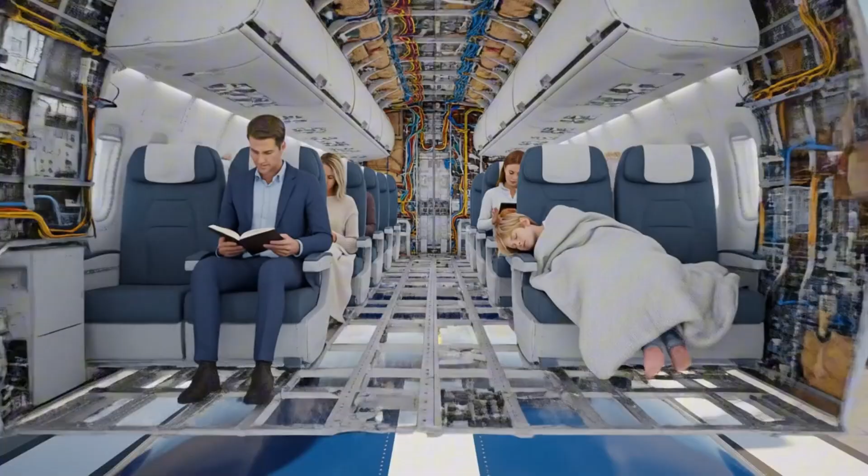But right beneath your feet, just inches away from where children are sleeping and people are reading, is one of the most volatile environments on Earth. You are casually hurtling through the sky while sitting on top of nearly 40,000 gallons of highly explosive aviation fuel.

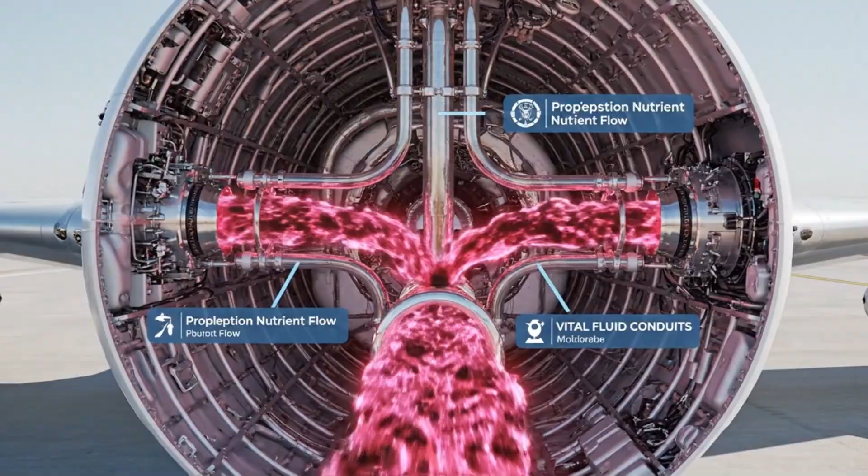If you were to look out the window right now, you would see the wings slicing through the clouds. Most people think those wings are just solid pieces of metal, carefully shaped by aerodynamic laws to keep the aircraft aloft. They imagine the fuel, the lifeblood of this massive machine, is safely hidden away in some armored vault deep within the belly of the plane.

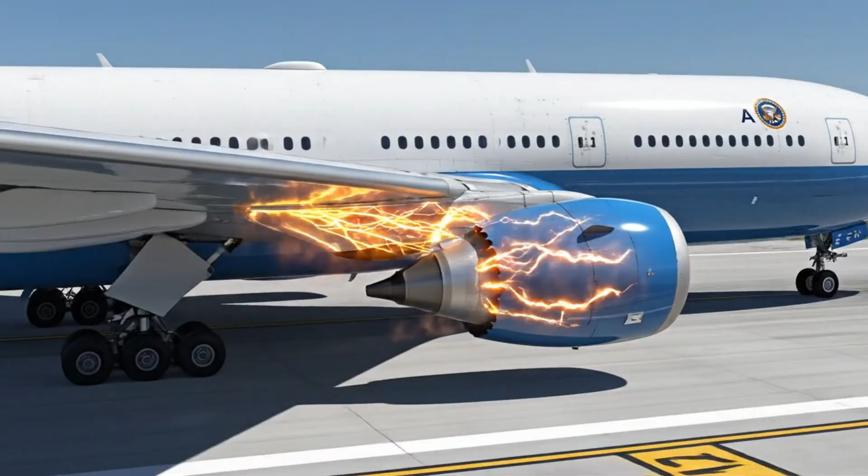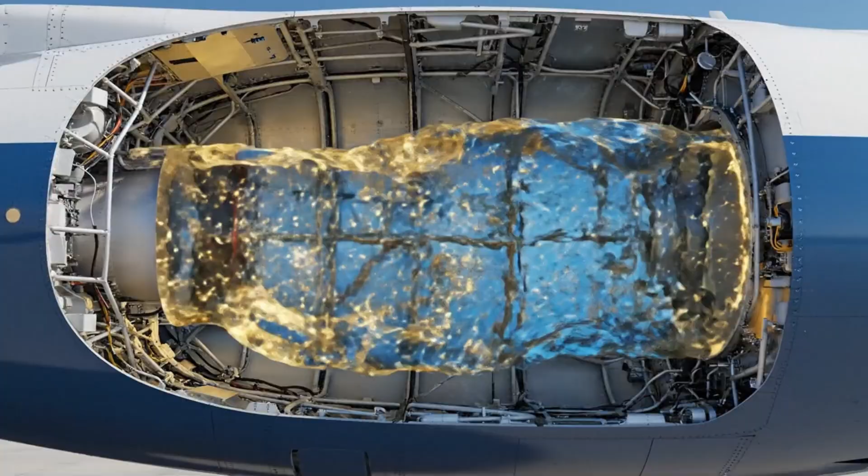But the truth is far more unsettling. Those wings are not just lifting you, they are holding the very explosive power that could tear the sky apart. The wings are the tanks. You are suspended in the air by two massive floating pools of kerosene.

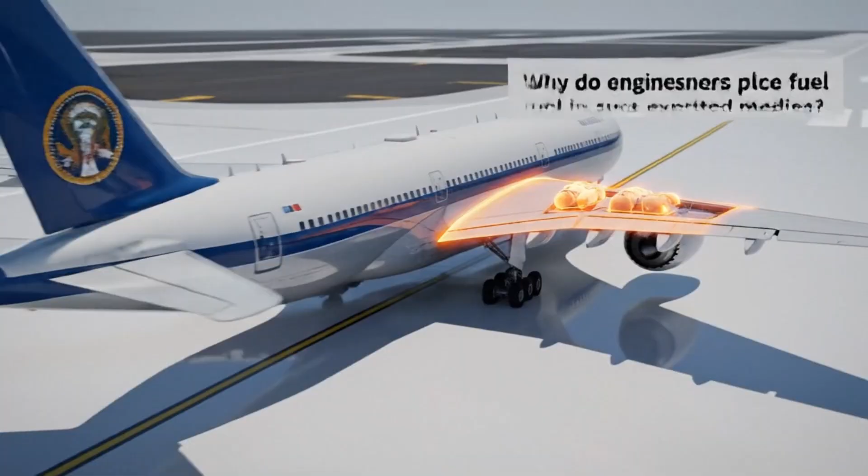Why would the world's most brilliant aerospace engineers take a perfectly good flying machine and pack its most vulnerable, exposed, and fragile extremities with thousands of gallons of flammable liquid? Why not put it in the center, where it is protected? It feels like a catastrophic design flaw.

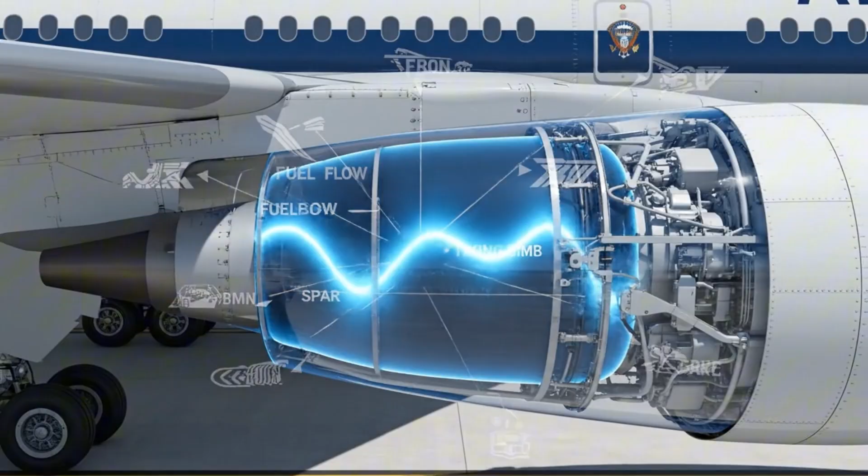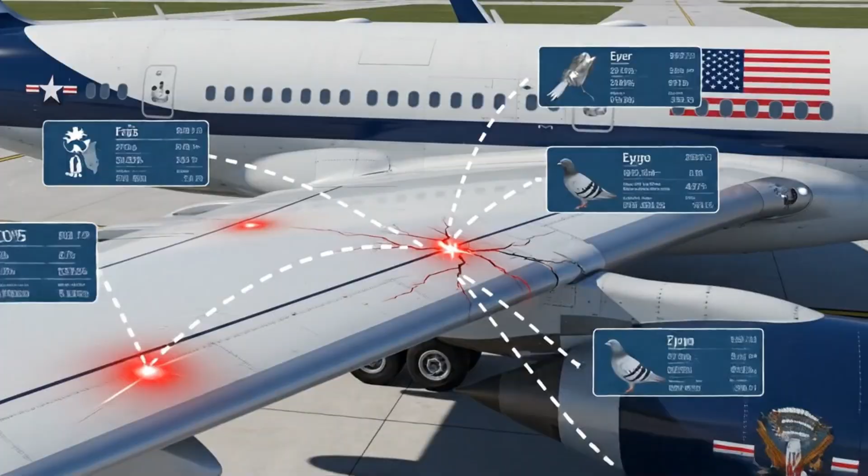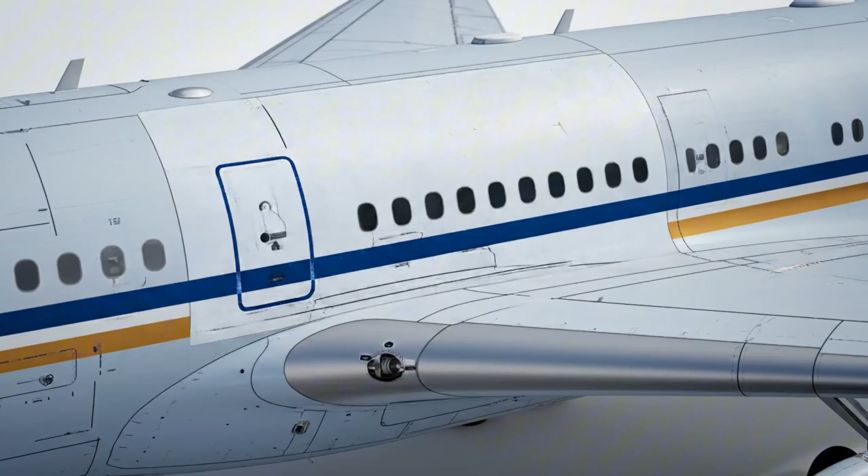It feels like a ticking bomb waiting for a single spark, a single bird strike, or a single structural failure to ignite. Have you ever really stopped to think about the sheer mechanical audacity required to keep you alive up there? We board these massive machines blindly, trusting a system we barely comprehend.

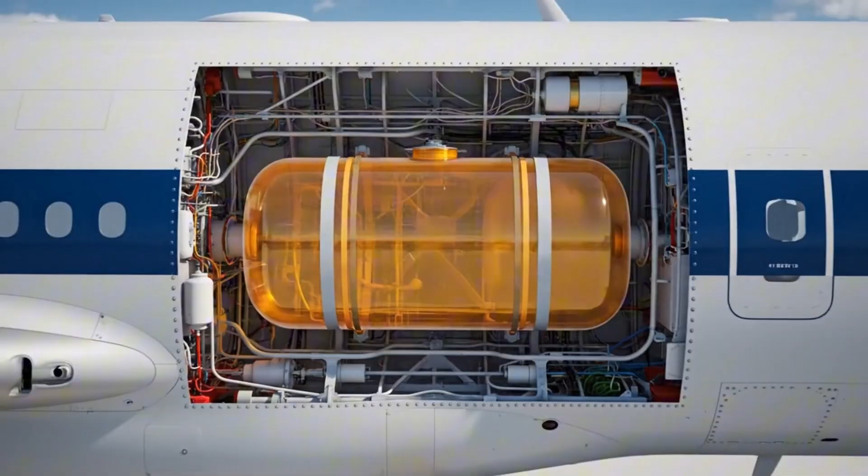Those who take a moment to look deeper into the shadows of aviation design usually find themselves questioning how we ever dared to conquer the skies in the first place, and perhaps realizing that true safety is just an illusion masked by clever engineering. The answer to this terrifying design choice isn't born out of convenience, it was born out of a desperate mathematical necessity.

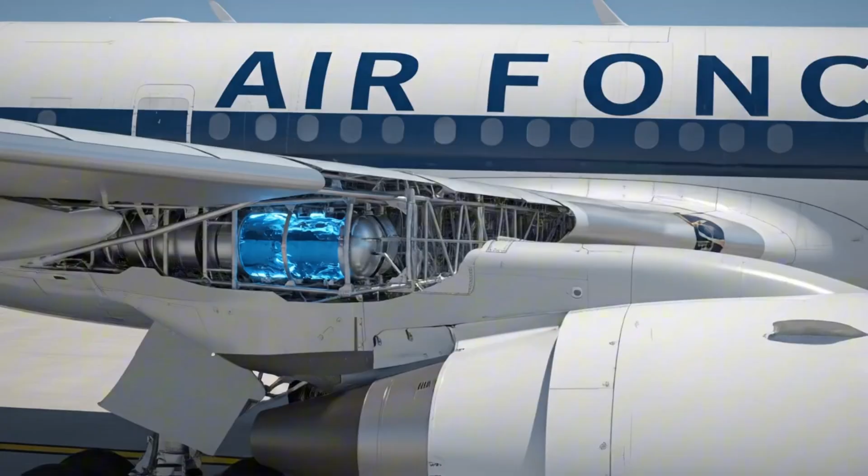If the fuel were stored where logic dictates it should be, none of us would survive the takeoff. The next time you walk down the jet bridge, you might want to pay closer attention to the shape of those wings, because they hide a secret that engineers rarely talk about with passengers.

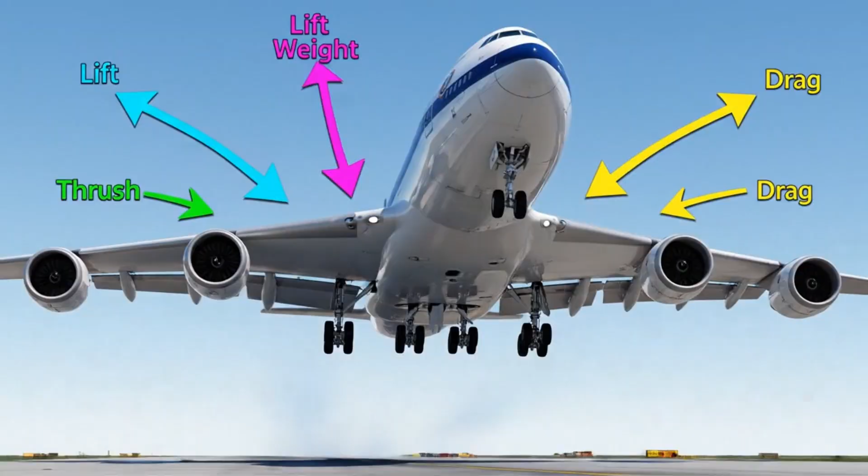The very thing that makes the wing a flying bomb is the exact same thing that prevents the aircraft from snapping in half mid-flight. To understand this paradox, we have to look at the invisible forces trying to destroy the plane the moment the wheels leave the tarmac.

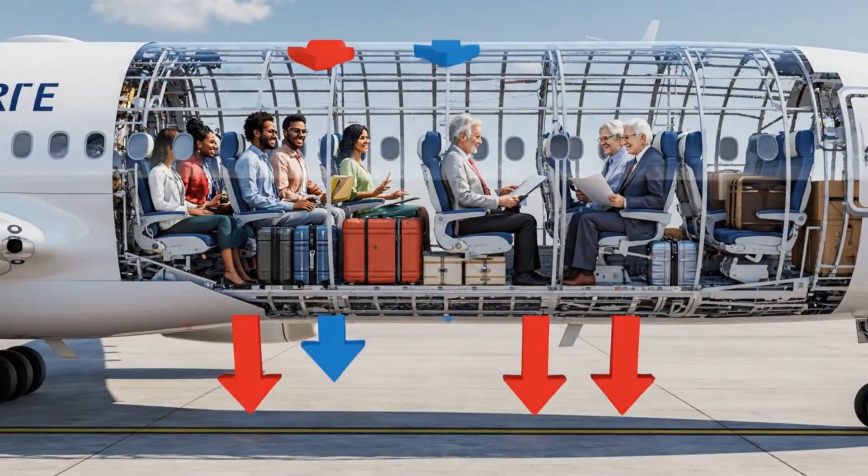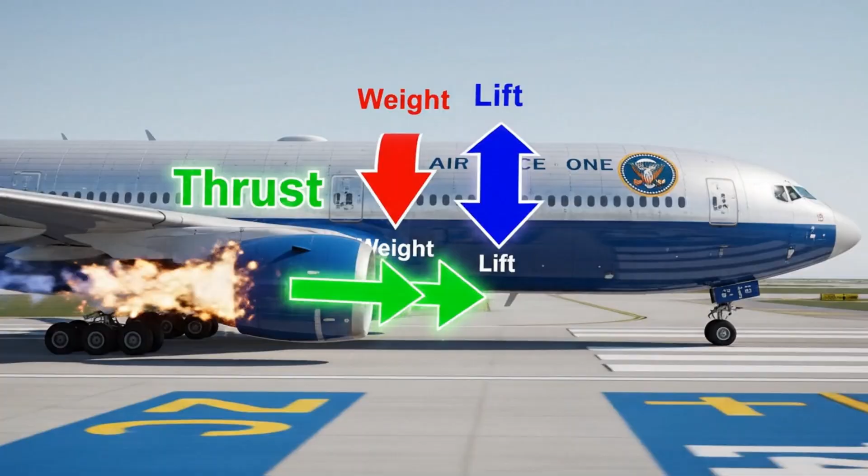Gravity is not the enemy here. The real enemy is the airplane's own weight. When a massive airliner sits on the runway, it is a dormant beast weighing hundreds of thousands of pounds. Every piece of cargo, every passenger, every piece of metal is pressing down toward the earth.

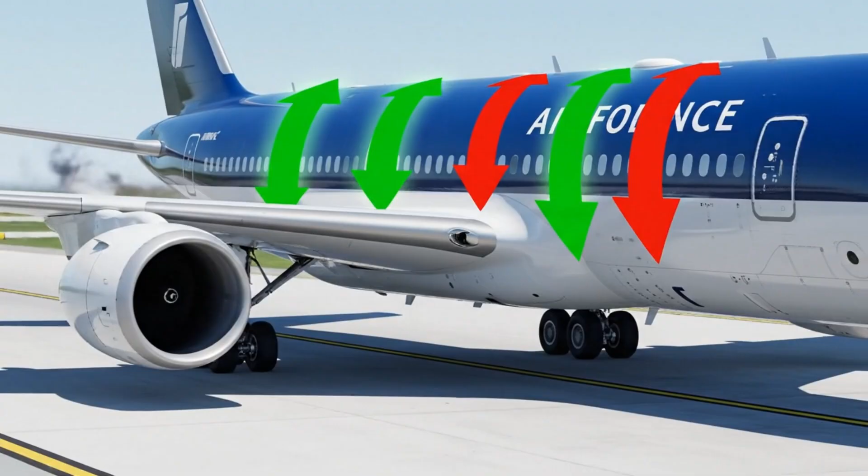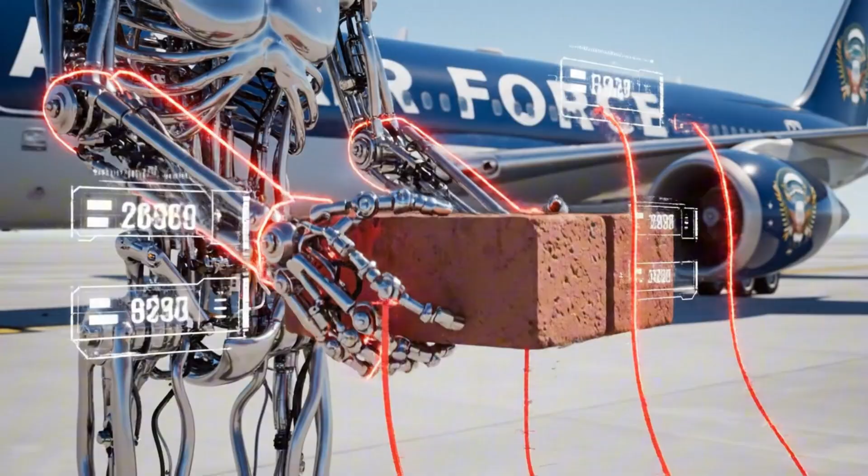But the moment the engines roar and the plane accelerates, a violent tug of war begins. The wings start to generate lift, pulling upward with unimaginable force, while the heavy fuselage, the main body where you are sitting, is being dragged down by gravity.

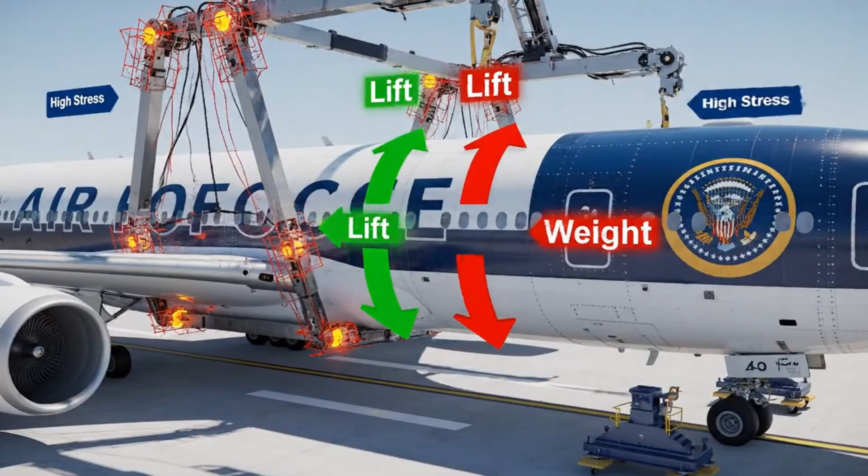Imagine holding a heavy brick with your arms outstretched. The tension on your shoulders is immense. Now imagine if those arms were thin, hollow metal structures trying to lift a multi-ton steel tube.

Under normal circumstances, the upward force of the lift and the downward force of the cabin would cause the wings to simply snap off at the root. It is a structural nightmare.

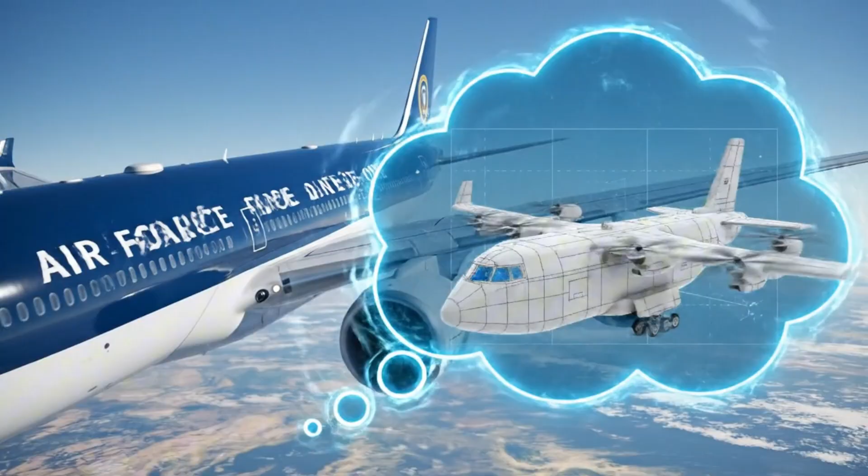Engineers realized early on that they could not just build thicker, heavier wings, because then the plane would never leave the ground. They needed a counterweight. They needed something heavy enough to push the wings back down, counteracting the violent upward lift, yet useful enough to justify bringing it along. Imagine what would happen if we actually followed our basic common sense.

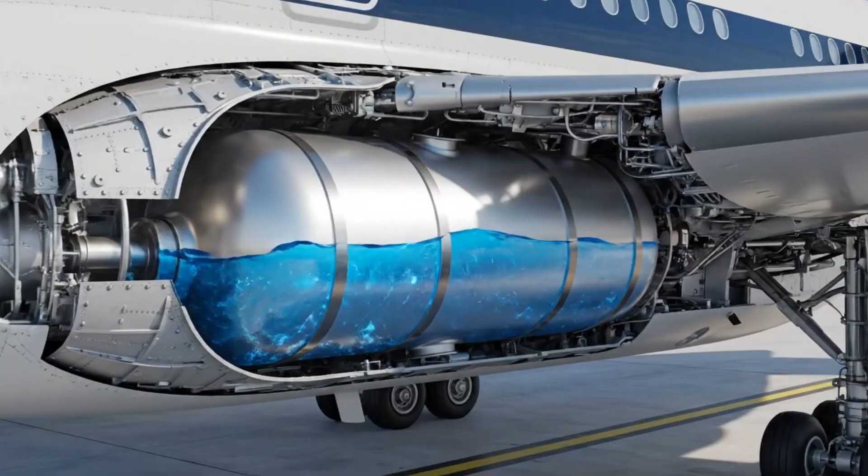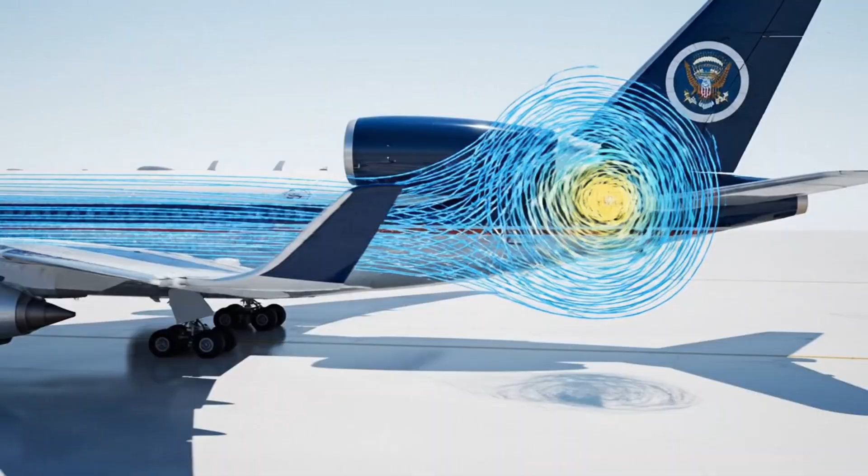Imagine if we took all that highly combustible fuel out of the wings and placed it safely inside the belly of the plane, far away from the engines and the fragile wingtips.

It sounds like a perfectly rational safety measure, but in the unforgiving realm of aerodynamics, human common sense is often a mathematical death sentence.

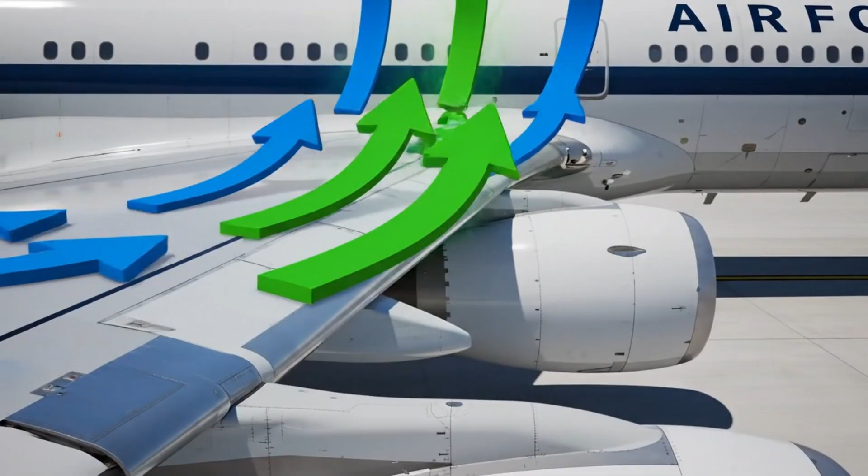If you were to load 40,000 gallons of dense liquid into the center fuselage, you would create an insurmountable concentration of mass right in the middle of the aircraft. Now picture that heavy fuselage speeding down the runway.

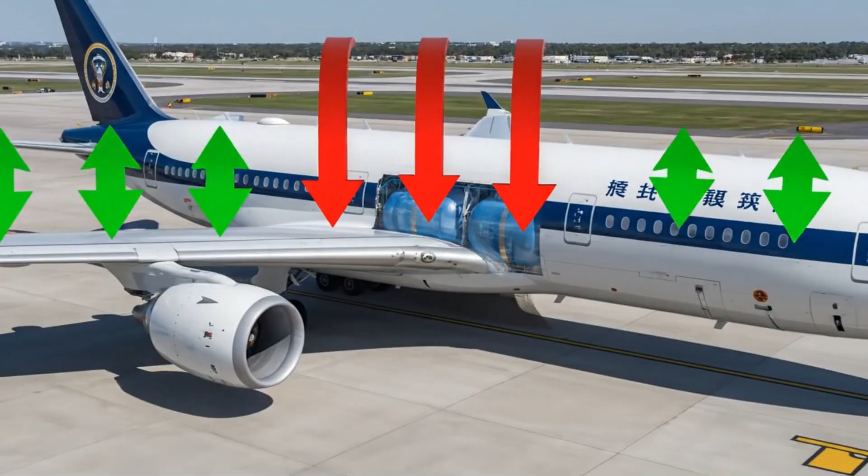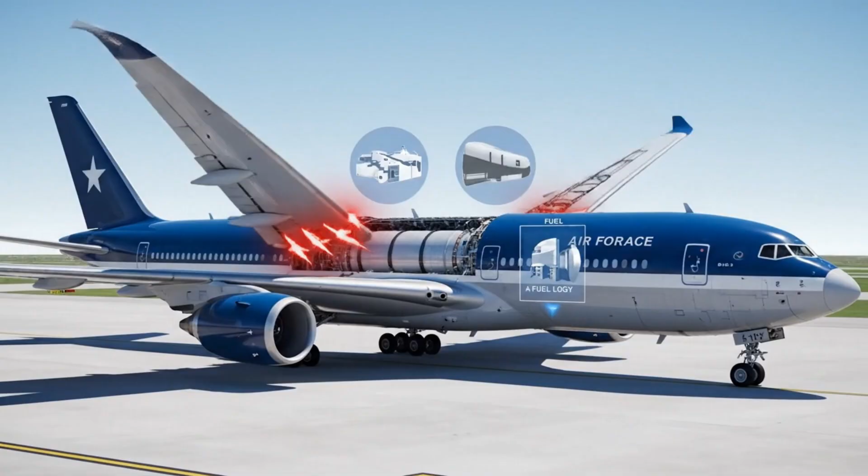As the aircraft gains speed, the wings do exactly what they were designed to do. They catch the air and violently pull upward. But the body of the plane, now burdened with the colossal weight of all that fuel, wants to stay dragged to the ground. The exact point where the wing connects to the fuselage is called the wing root.

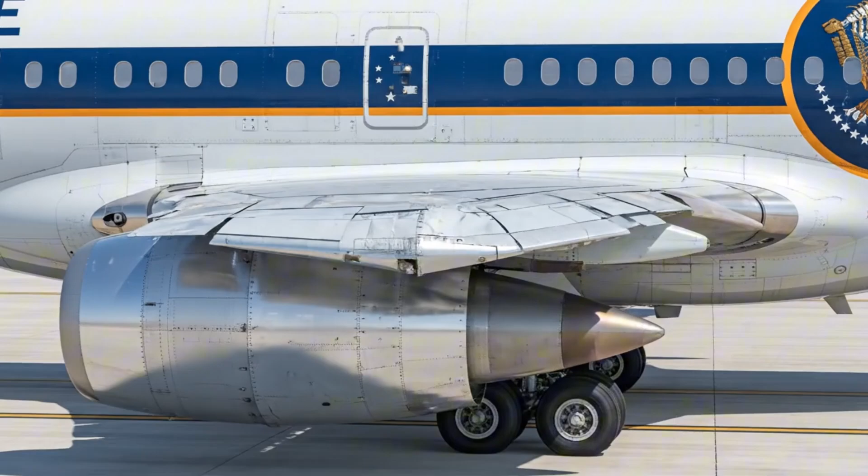If the fuel were stored in the center, this joint would suddenly be subjected to a terrifying amount of mechanical stress. The wings would desperately try to fly upward, while the immensely heavy body would drag downward. Within seconds of leaving the tarmac, the sheer leverage would be too much for any known metal to withstand.

The wings would bend, fold upward like a fragile object caught in a crushing vise, and ultimately snap clean off the aircraft. The very design choice that seems intuitively safer would guarantee a catastrophic structural failure before the plane even reached the clouds. This is the terrifying brilliance of modern aerospace engineering.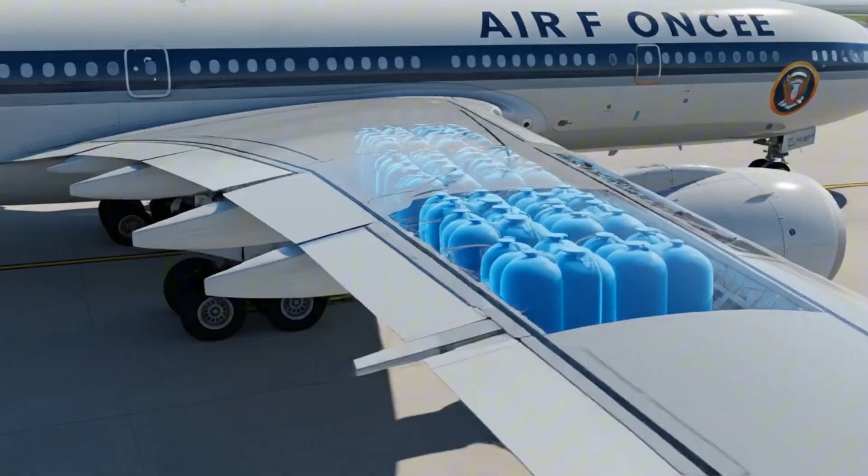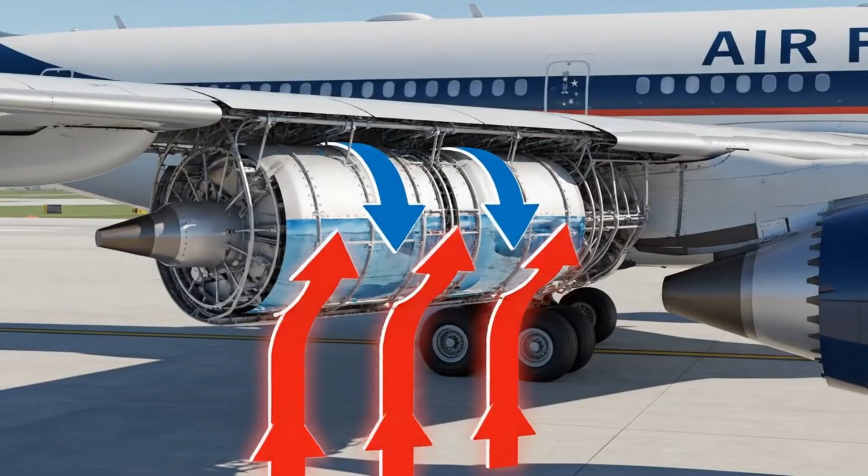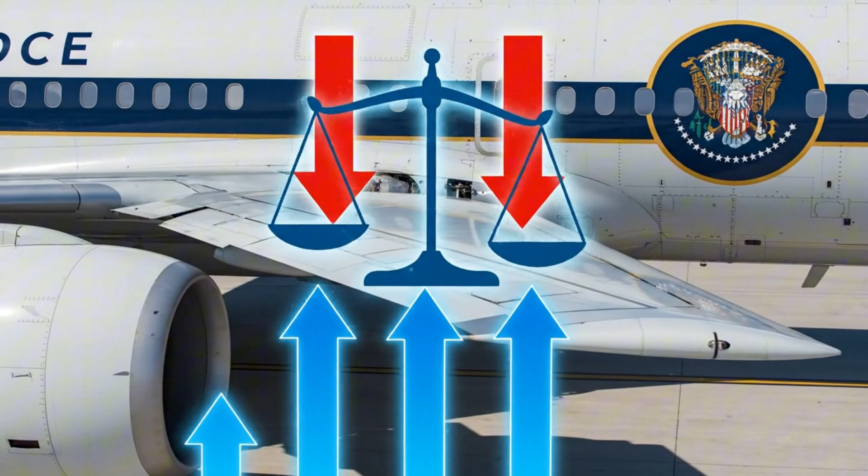The designers did not put the fuel in the wings simply because it was empty space. They put it there because they desperately needed the weight. By spreading those tens of thousands of gallons of heavy liquid evenly across the entire length of the wings, they created a perfectly balanced counterforce.

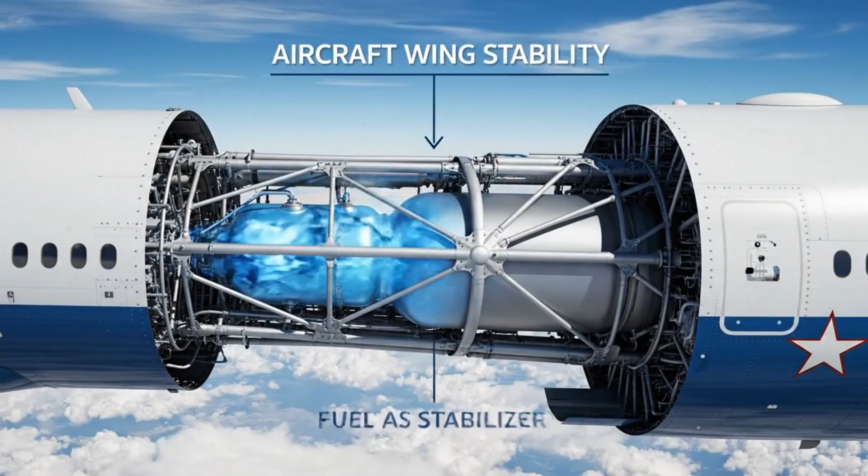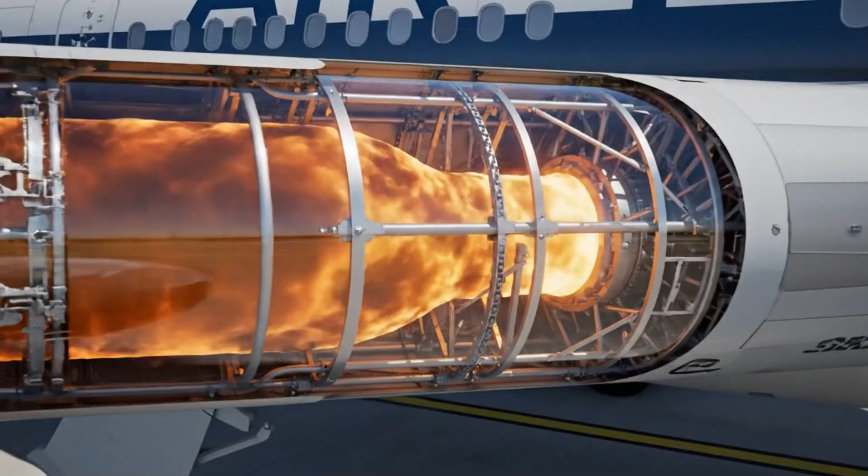As the violent air pushes up against the bottom of the wing, the immense weight of the fuel pushes down from the inside. The terrifying forces cancel each other out. The fuel essentially acts as a structural stabilizer, absorbing the brutal stress of flight and keeping the wing firmly in place. It is a haunting paradox to accept.

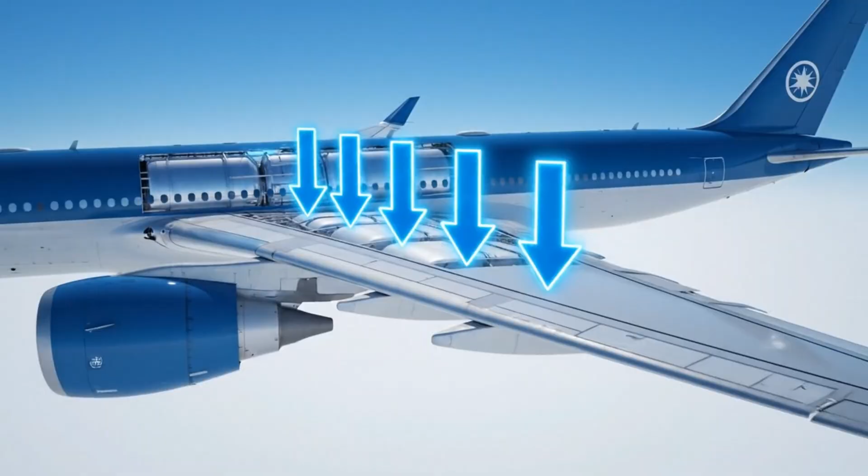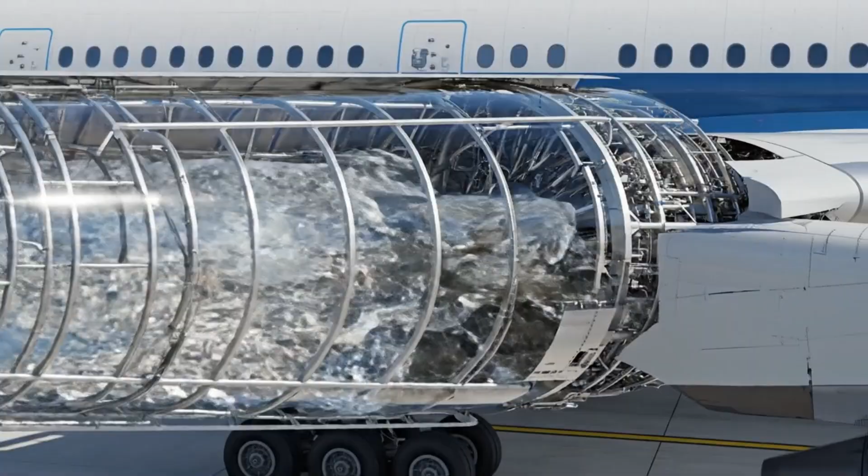The highly explosive liquid that you instinctively fear might cause a disaster is the exact same physical weight holding the entire aircraft together right now. Without the heavy burden of that fuel pushing down on the aluminum, the plane would literally tear itself apart.

But solving this gravitational nightmare created a completely different kind of monster. If the wings are essentially just massive hollow shells holding thousands of gallons of loose liquid, how do you stop all that immense weight from violently sloshing around and throwing the plane completely out of the sky the moment it hits a storm?

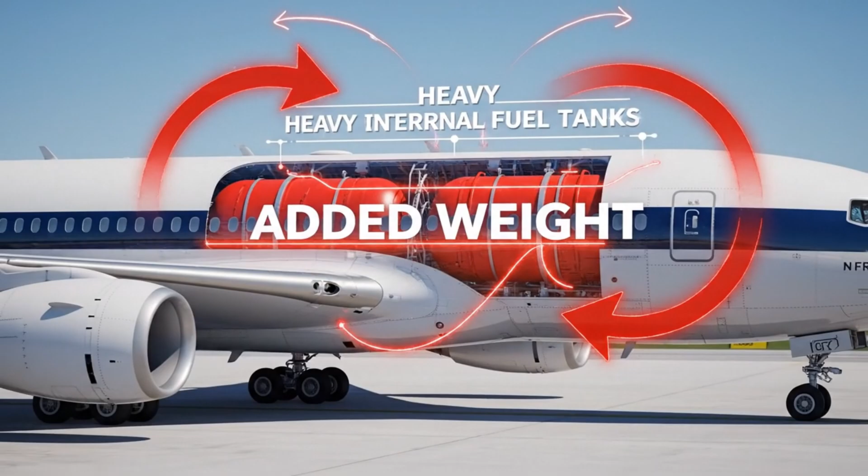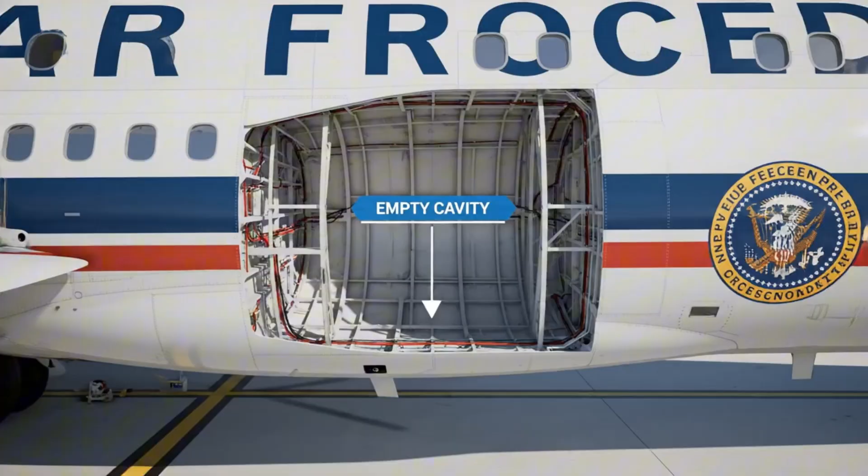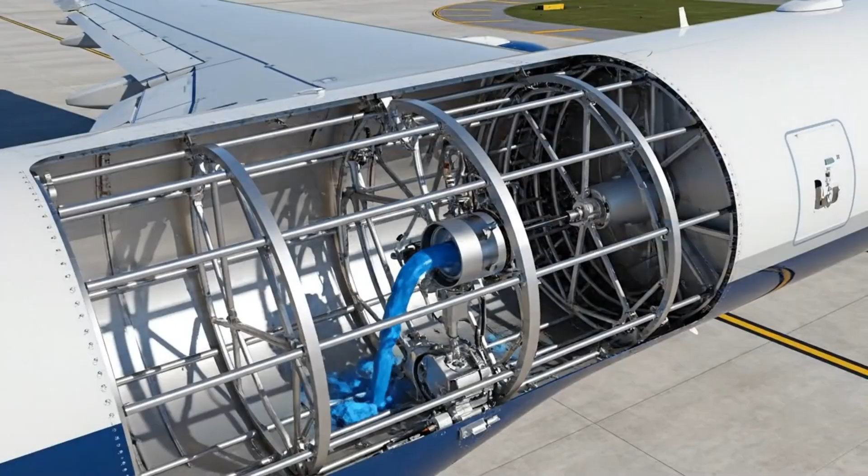Most people assume that inside the wing of an airplane there is a series of strong metal barrels or reinforced rubber bladders securely strapping the fuel in place. They imagine a separate, heavily protected container hiding safely within the aluminum shell. But if engineers actually did that, the added weight of those heavy internal tanks would make the aircraft entirely too heavy to fly efficiently.

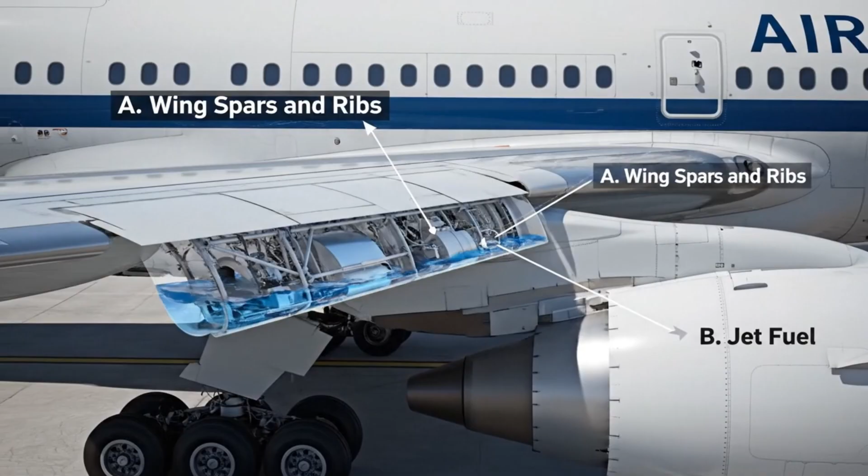So they did something that sounds borderline reckless to the average person. They didn't put a fuel tank inside the wing. They turned the entire wing itself into the tank. This is known in the world of aviation as a wet wing.

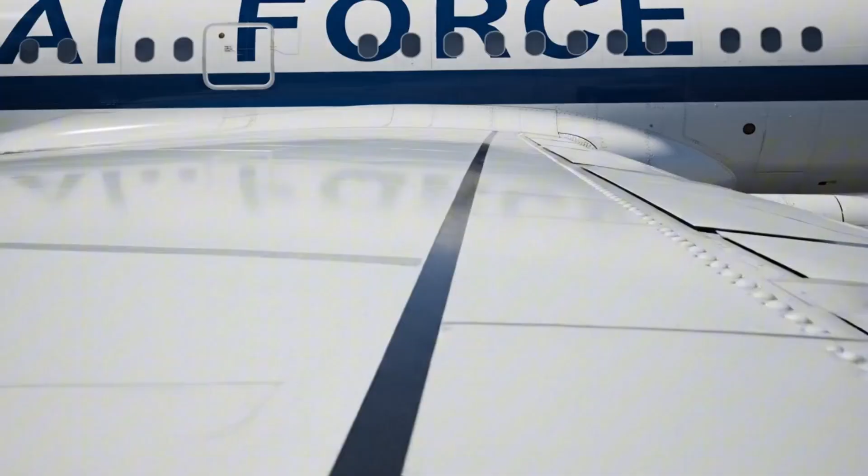When you look out your window and watch the wing flexing and bouncing in the turbulence, you are not looking at a hollow piece of aerodynamic metal. You are looking directly at the outer wall of a massive, sloshing swimming pool of aviation-grade kerosene.

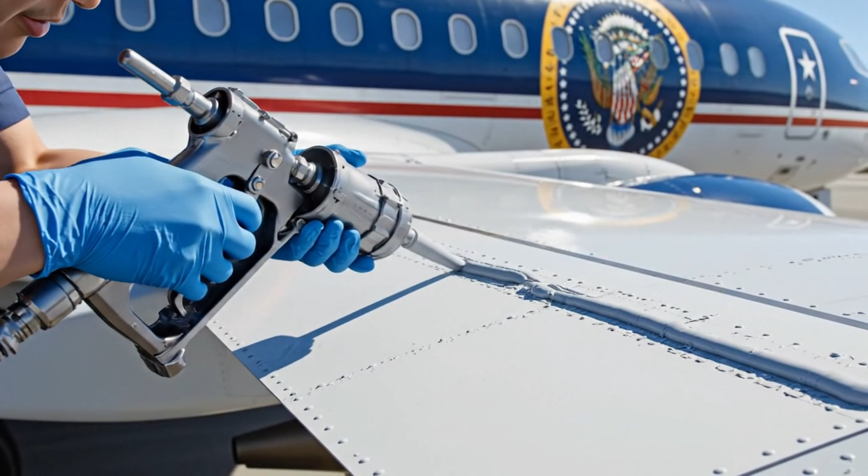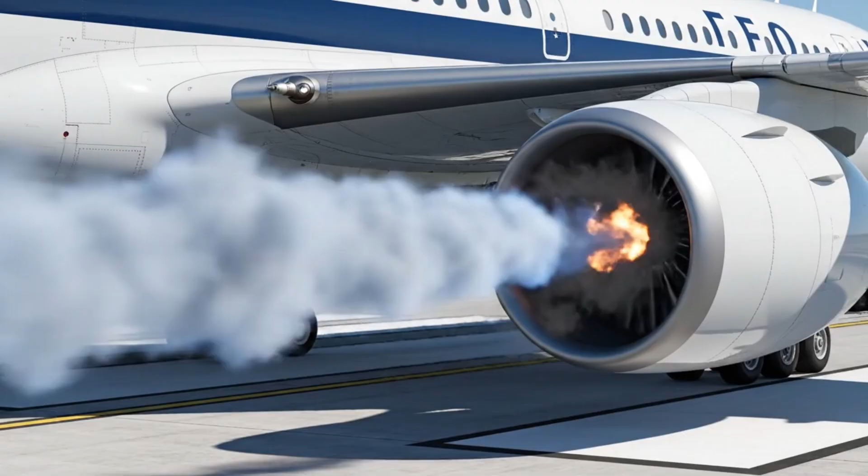Every single rivet, every single overlapping seam, and every microscopic gap in that aluminum structure has to be painstakingly sealed by hand with a specialized aerospace compound. If just one critical seal fails under the immense pressure and vibration of flight, the fuel will seep out into the freezing air, atomizing into a highly flammable mist trailing right next to the scorching hot exhaust of the jet engines.

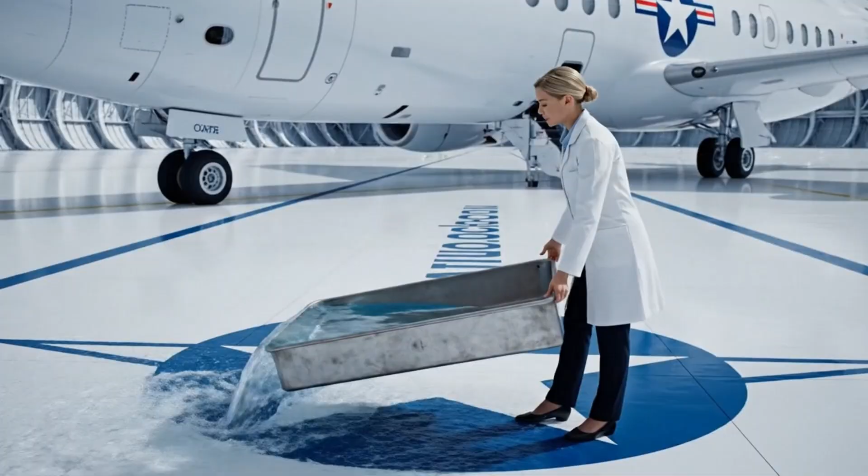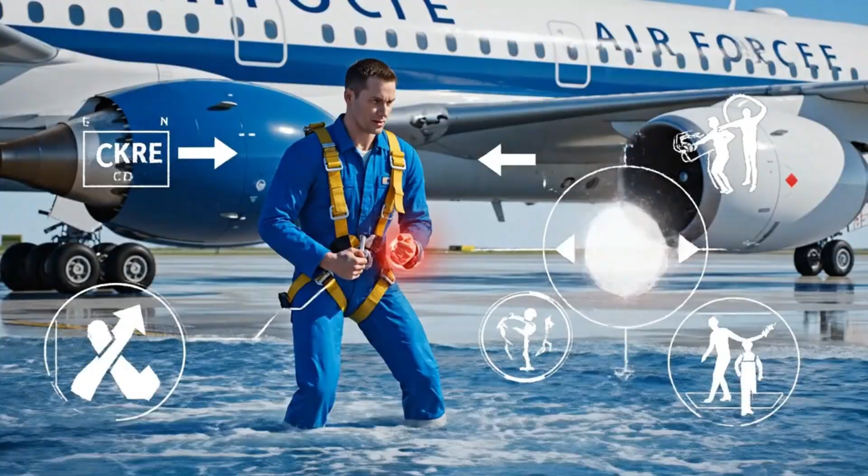But a wet wing creates a terrifying physical problem that could easily doom the flight. Imagine carrying a large, shallow tray of water across a room. As you take your first step, the water immediately rushes to one side, completely throwing off your balance and nearly twisting your wrists. Now scale that up to tens of thousands of gallons of heavy liquid trapped inside a metal tube traveling at 600 miles per hour.

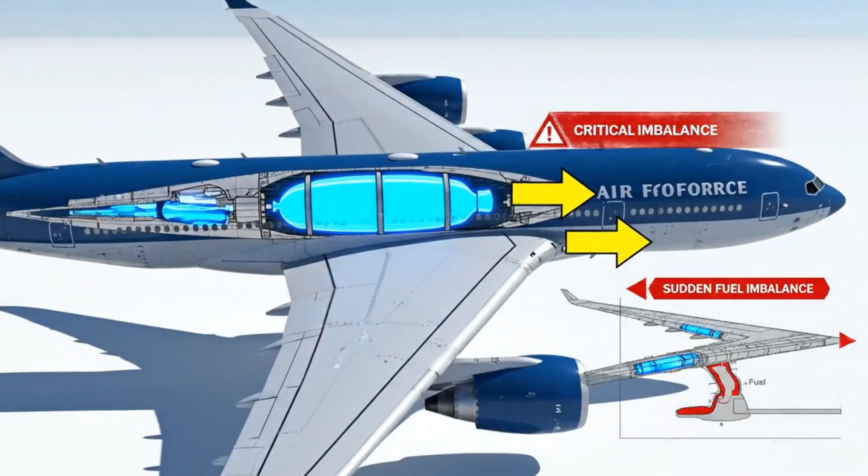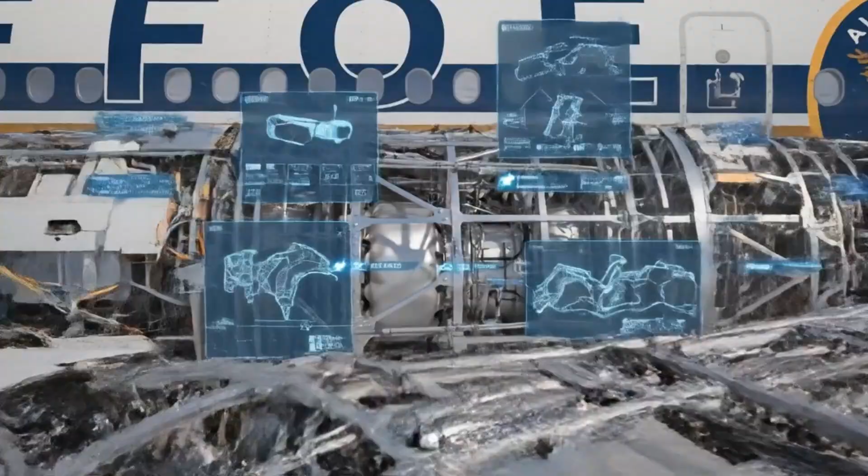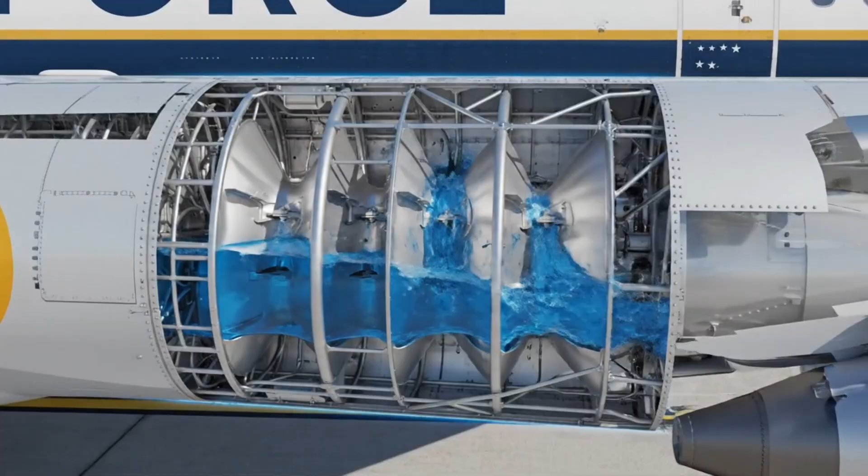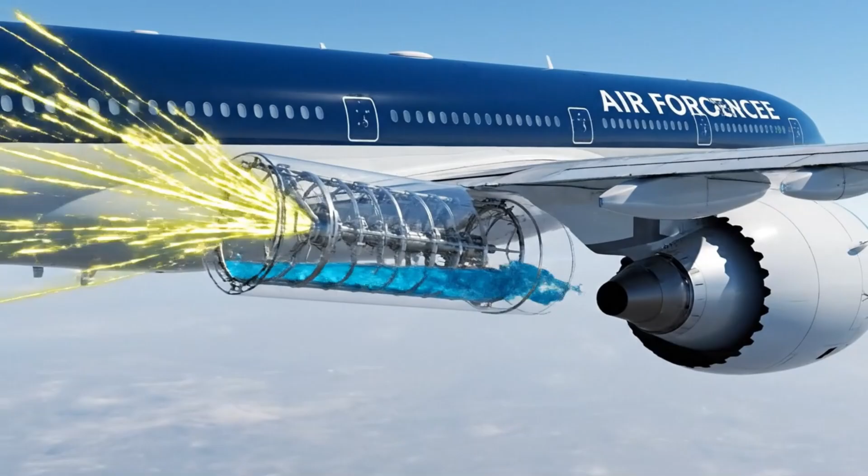If all that volatile fuel were allowed to freely rush to the very tip of the wing every time the plane banked for a simple turn, the sudden shift in gravity would violently flip the massive aircraft completely upside down. To prevent this fatal shifting, the inside of the wing is designed like a claustrophobic mechanical labyrinth, intricately built with a series of solid metallic walls with strategically placed holes known as baffles.

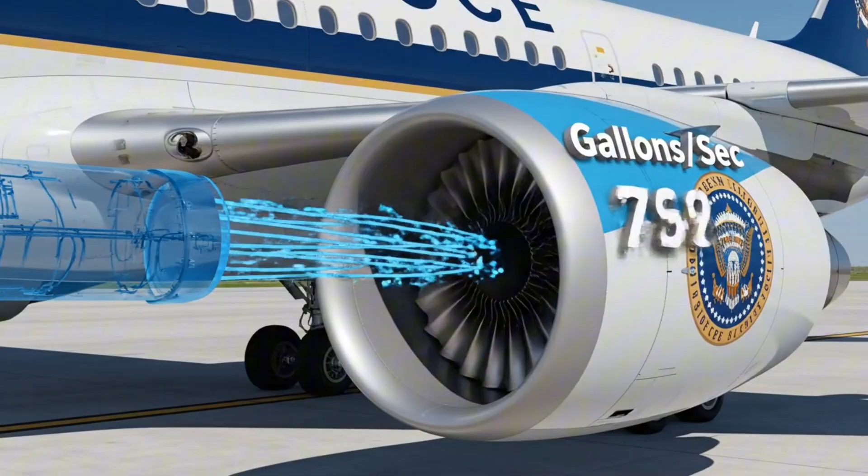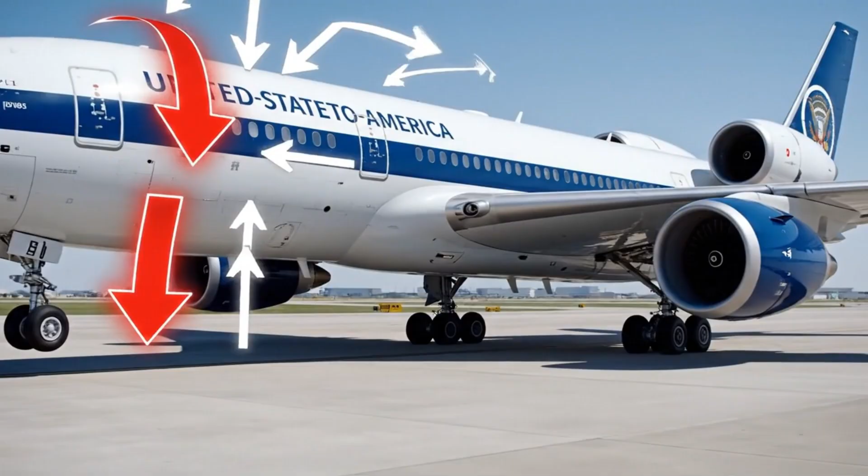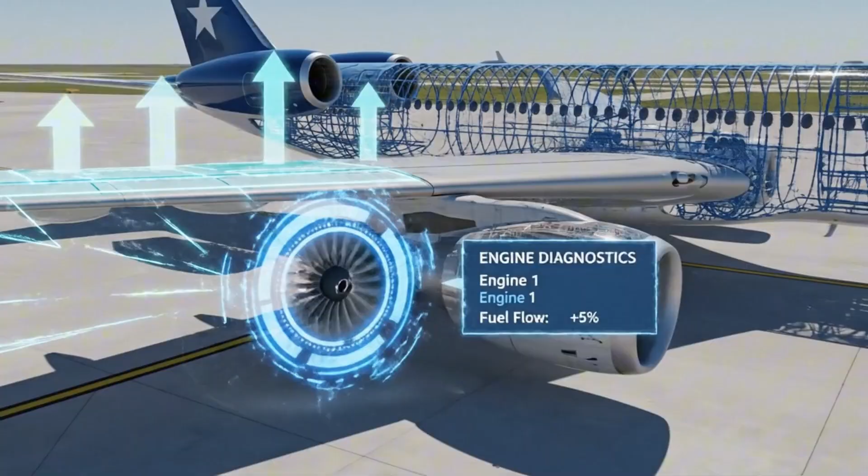And this creates an entirely new nightmare for the pilots sitting in the cockpit. Because if the engines do not drink this fuel in perfect symmetrical harmony, the aircraft will slowly begin to tilt toward its own destruction. Every minute you are in the air, the massive jet engines bolted to the wings are burning through gallons of fuel. But they rarely burn it at the exact same rate.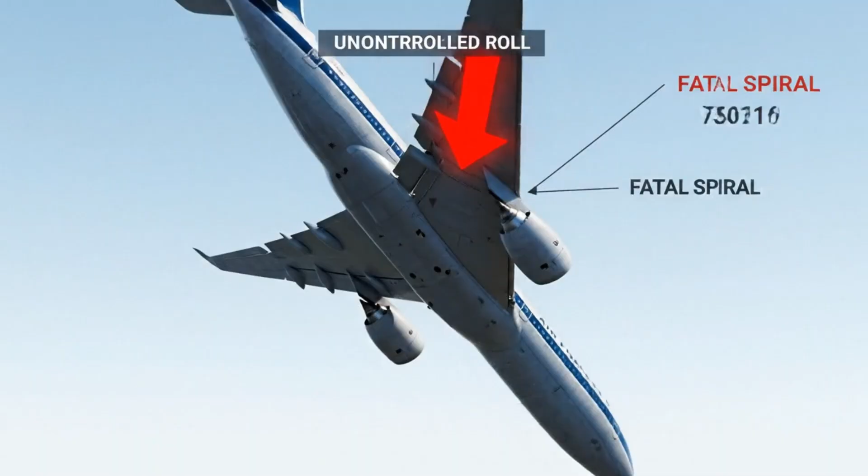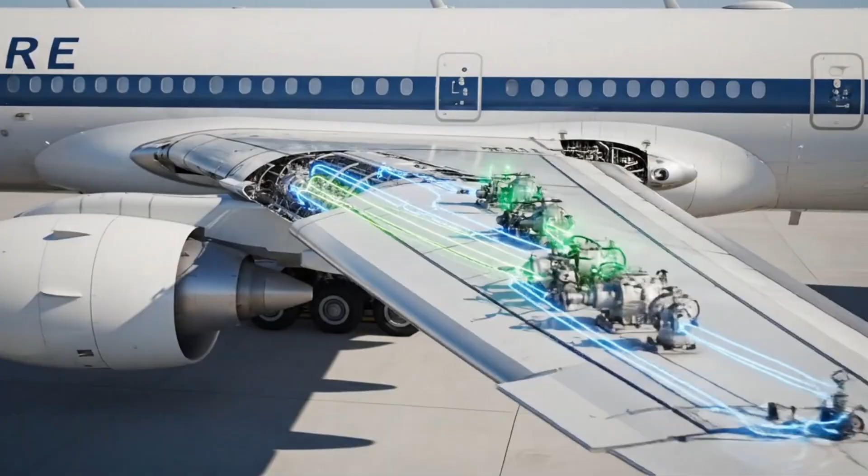If the left engine consumes just a fraction more fuel than the right engine, the left wing becomes lighter. Slowly, imperceptibly at first, the lateral balance of the aircraft begins to shift. If left completely unchecked, the heavier wing would violently drag the plane down, causing it to roll uncontrollably into a fatal spiral. To prevent this, hidden deep within the belly of the plane, a completely automated network of pumps and valves is constantly fighting a silent war against gravity.

Without any direct input from the pilots, this electronic brain is constantly transferring fuel back and forth between the wings, meticulously maintaining the fragile equilibrium of the aircraft. You are kept perfectly level, not just by the wind, but by a continuous high-stakes balancing act of liquid weight.

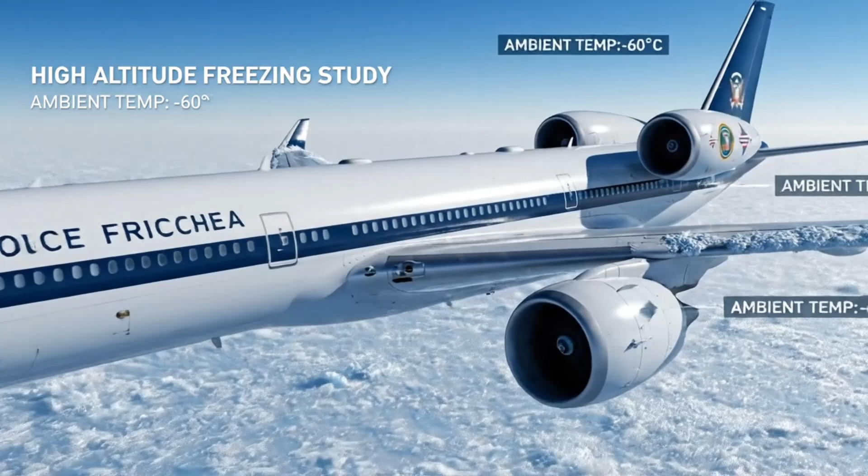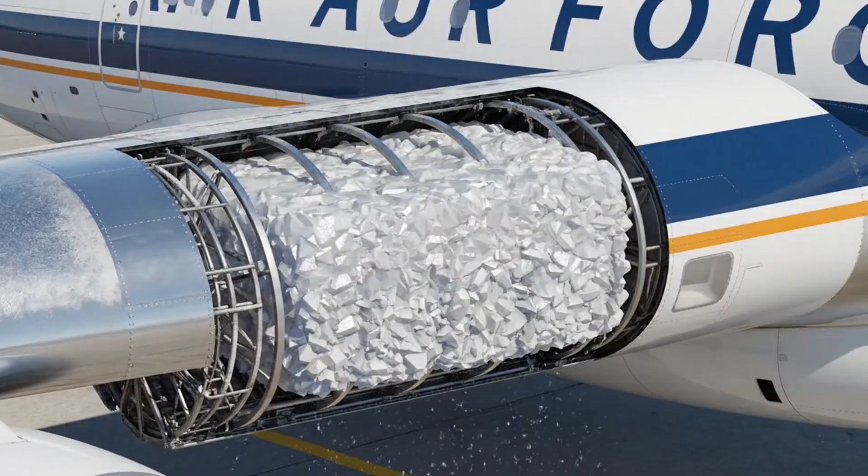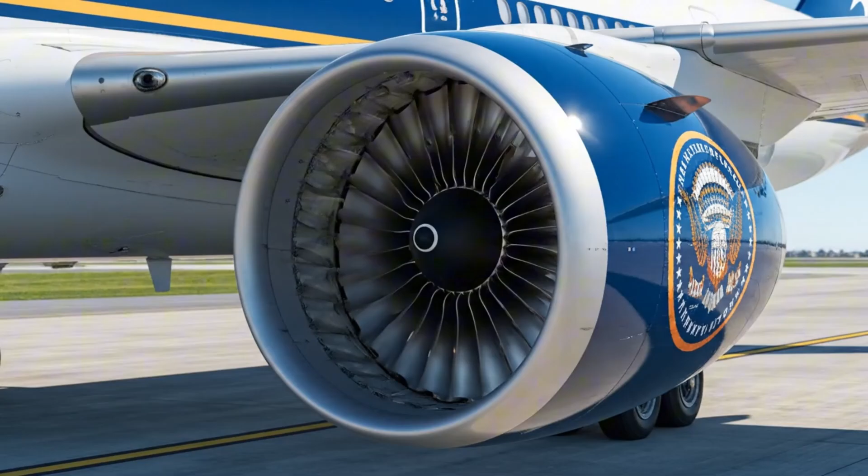And as if the threat of structural failure and catastrophic imbalance was not enough, there is an even more hostile enemy waiting just outside your window. At cruising altitude, the temperature drops to a bone-chilling -60 degrees Celsius. You are essentially flying through a frozen wasteland. The aluminum skin of the wing is subjected to this extreme cold for hours. By all laws of nature, the tens of thousands of gallons of liquid fuel pressed right up against that freezing metal should turn into a solid, useless block of ice, starving the engines and sending the plane plummeting back to Earth. So why doesn't it?

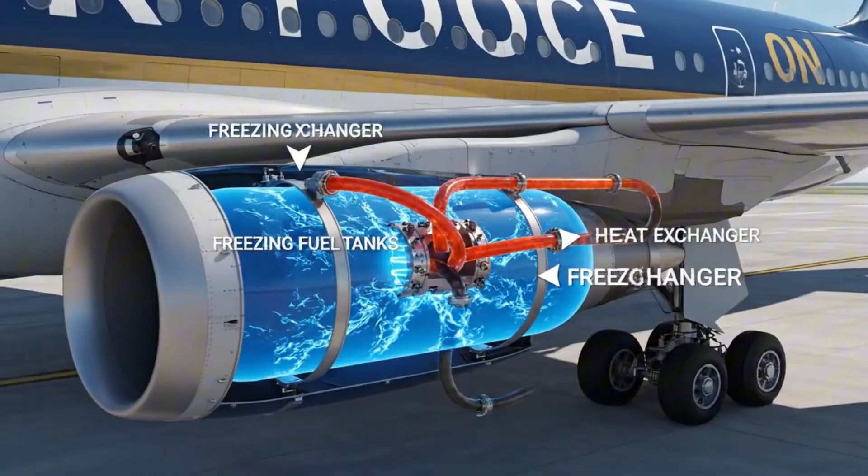The answer lies in a terrifyingly brilliant piece of thermal recycling. The jet engines generate an immense amount of friction and heat, and the oil keeping those internal turbines running gets dangerously close to boiling. Engineers designed a closed system where this blistering hot engine oil is routed back through a network of pipes directly into the freezing fuel tanks.

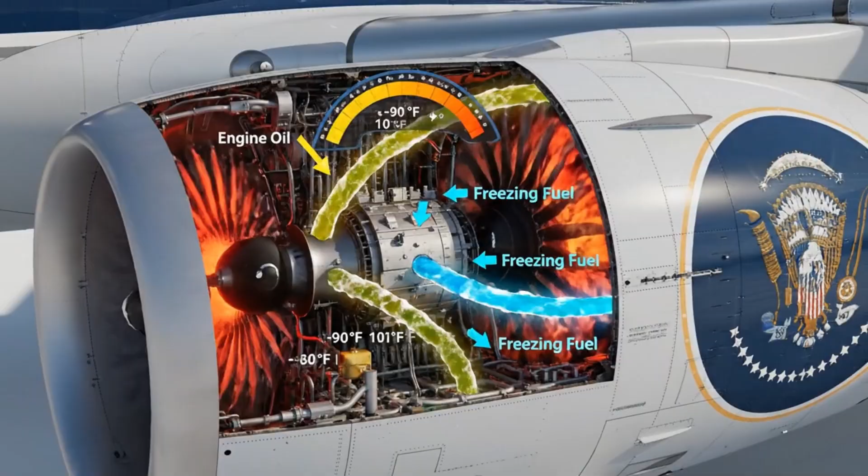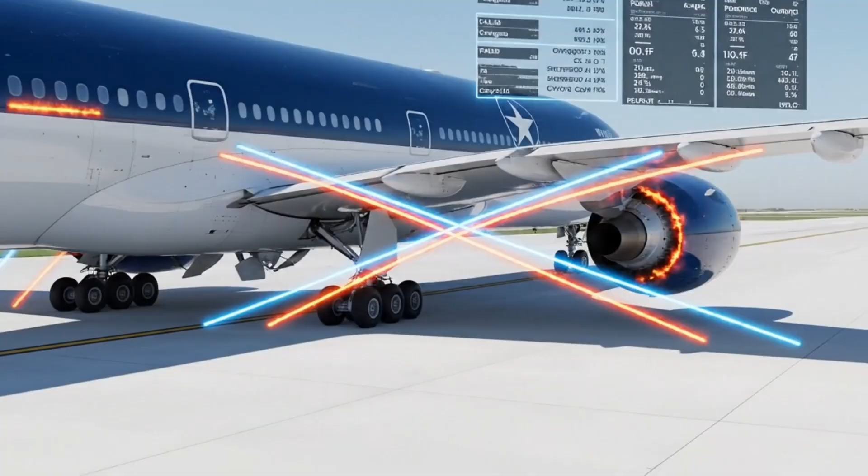The blistering heat of the engine oil warms the freezing fuel, keeping it liquid, while the freezing fuel simultaneously cools down the engine oil, preventing the turbines from completely melting down. It is a perfect, continuous loop of survival. The freezing sky and the burning engines are forced to keep each other in check, just inches away from where you are sitting.

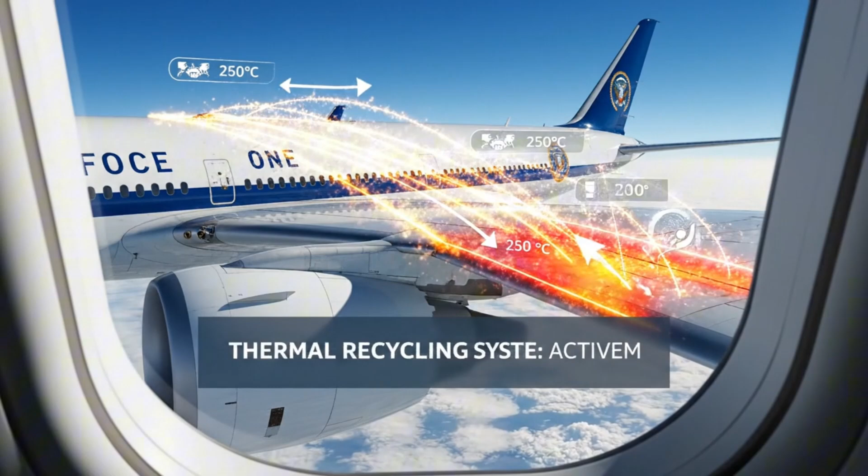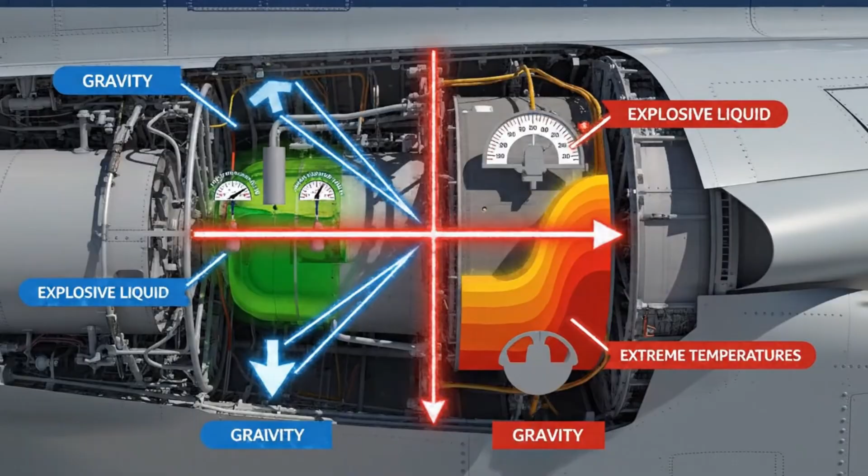The next time you fly, look out at that wing, look past the painted metal and the rivets, realize that you are sitting inside a fragile ecosystem of explosive liquid, extreme temperatures, and brutal gravitational forces, all perfectly balanced on a mathematical knife's edge.

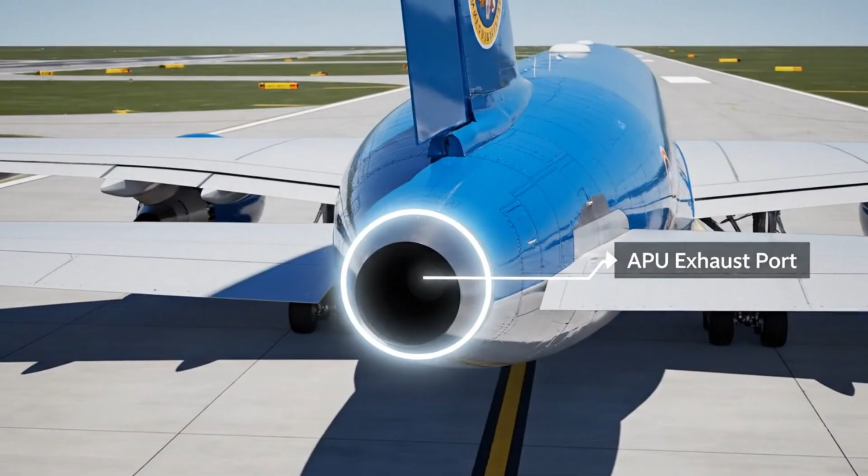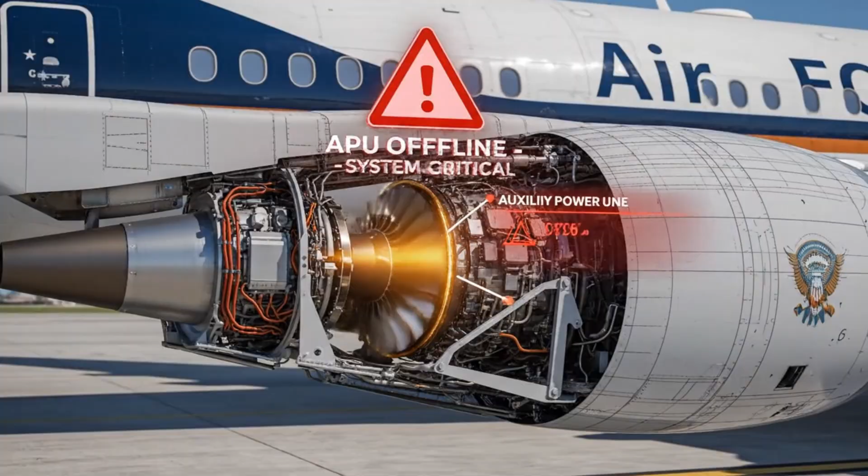But balancing the fuel is only part of the equation, because if you look closely at the tail of the plane, you might notice a strange dark hole at the very back. Most passengers never see it, and airlines certainly do not advertise what it actually does. But if that hidden engine inside the tail ever stops working, everything we just talked about simply ceases to matter. Have you ever wondered what is hiding in the dark at the back of the plane?